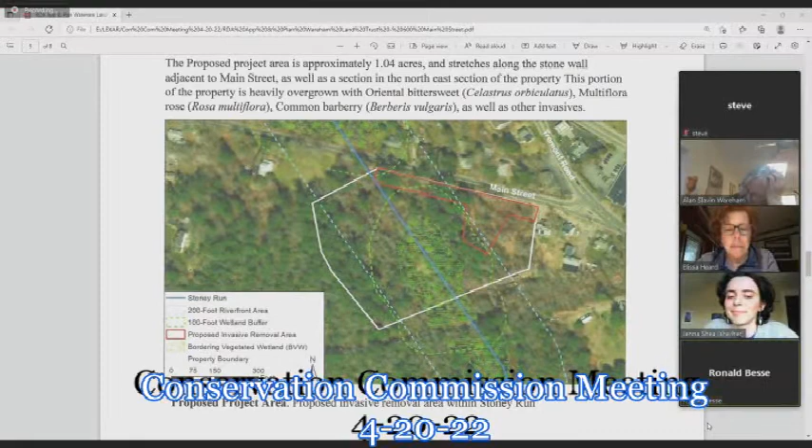Is there anybody on the line that would like to comment on this project? I would like to close the hearing. Second. I have a motion and I heard a second. All in favor, Elisa, Ron, yes. Denise, Carol, yes. Kwame, yes. Michael, Sandy. Thank you. The hearing is closed. I'm gonna be as quick as I can with the names. We have 11 new hearings, so keep yourself active and don't mute. You won't have time to unmute.

Okay, so we have a closed hearing, and I move that we accept the project as presented with a negative 2. Second. That is the motion and it's seconded. All in favor. Elisa, Ron, yes. Denise, yes. Carol, yes. Kwame, Michael, Sandy. You're done. Thank you. Dave, when can they start cutting?

Check with Dave. Once I get them the paperwork, they can get out there and start getting at it. So there you go. Wait for the paperwork from Dave before you go, and good luck. And I did appreciate your initial removal and maintenance and follow-up as part of your project description. I didn't expect anything but the best from the land trust.

Thank you. Well, thank you. Next one, please. Have a good night. Night. We ready?

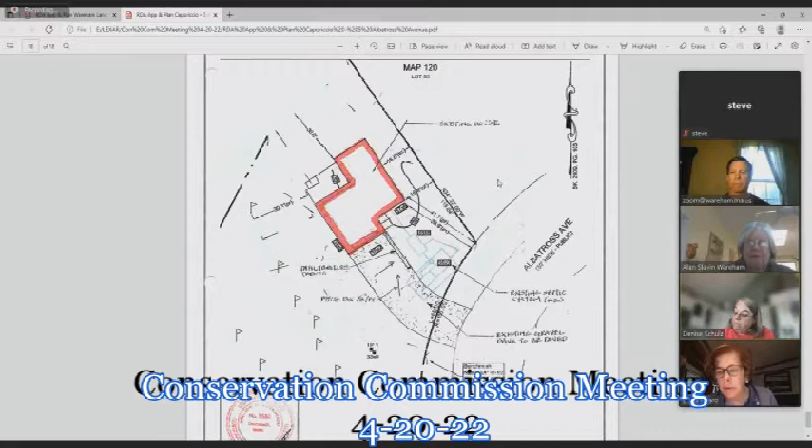Thank you. Is there anybody here to represent this project? This was a project that would have been represented by Bill Lockwood. I had not seen him on, so if the commission wants to table it. I move that we table the discussion. Second. I have a motion and a second to table. All in favor: Elisa, yes. Ron, yes. Denise, yes. Carol, yes. Kwame, yes. Michael, yes. Sandy, tabled. Okay, next hearing.

Notice of public hearing pursuant to the provisions of the Massachusetts Wetland Protection Act, General Laws, Chapter 131, Section 40, and the Wareham Wetland Protection Bylaw, Division 6. A public hearing will be held on Wednesday, April 20th, 2022, at 6:30 p.m. on the request for determination of applicability for Ann Vangos, care of Braza Construction, 16 Main Road, Mendon, Mass., to install a paved driveway located on Assessor's Map 46A-1, Lot 24, 62 Pinehurst Drive, Wareham, Mass.

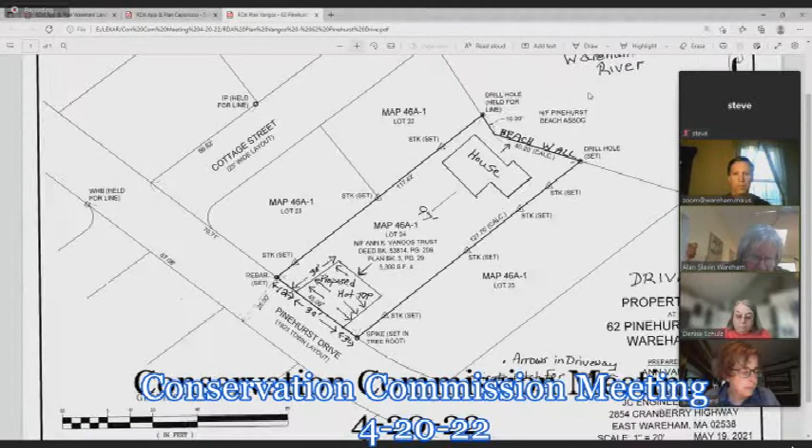Thank you. Is there anybody here representing this project? Braza Construction's here. Paul, is that right? Yes, Paul Braza, yep. Okay. Mr. Pichette will read the project.

Okay, so this project site is at 62 Pinehurst Drive, and this project involves placing a paved driveway on this property. Currently there was just a gravel driveway on the property, and recently there was some work done at the site to remove some tree stumps and whatnot, and the owner wishes to put a paved driveway in that would be 30 by 30 feet in size. Again, up close to the road in the general location where they used to park. They are going to propose the driveway to pitch in either direction to the side versus sloping out back onto the street.

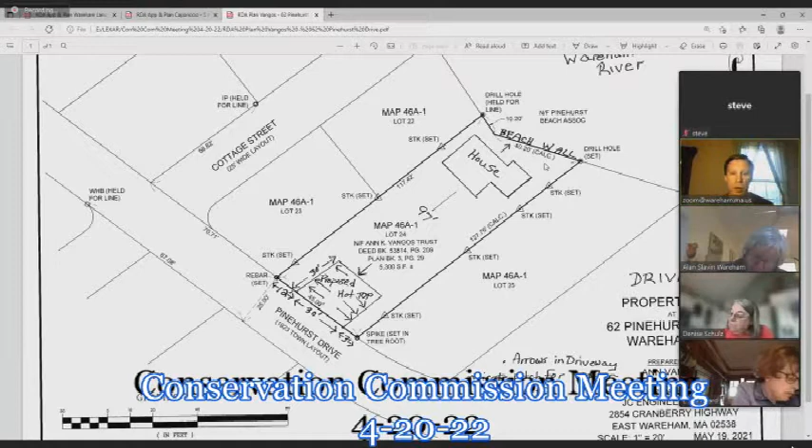So again, the project is in the buffer zone to the coastal bank and the coastal beach, approximately 90 feet from the coastal bank. So I would recommend the approval of the project with a negative determination number 3. Paul, anything to add? No, it's pretty self-explanatory. It's very easy to pitch the driveway the way we requested to both sides. We'll just crown it in the middle and keep the runoff to filter into the ground.

Thank you. Questions, Elisa? Yes, on either side of your 30 feet, how much space is there of ground? If you're staring at the house, on the left side there's probably 10 to 12 feet. Okay. On the right side is about 3 or 4. And what about your neighbors? Are they going to be affected by this? They're not going to be affected by this. Their driveways are far away from that, and they have grass beside it.

So then my other question would be, we're pretty favorable to a driveway that percolates water as well, so a pervious driveway. I don't know if you've given any thought to that. We have not, because the driveway is not very large. That's all the more reason, only because it would be cheaper, not cheaper than doing a regular one, but a pervious asphalt driveway, is my question. Yeah, we have not thought about that, but we can think about it. Thank you.

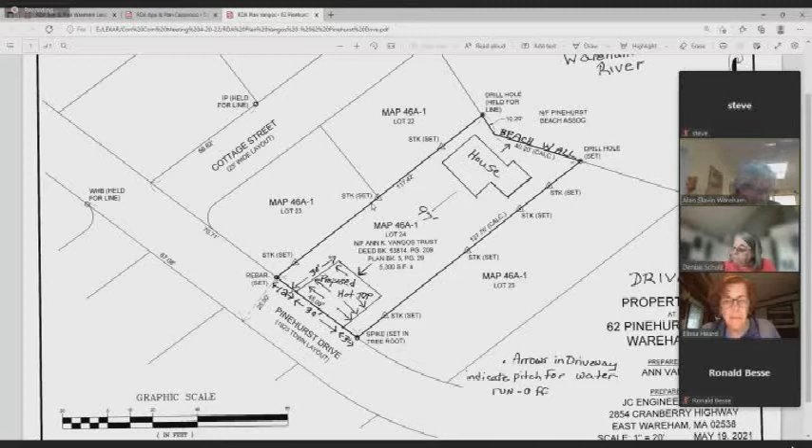Carol? Could I speak by any chance? Yes, sorry, Paul. I'm just asking. You gotta be quicker. I'm sorry, every driveway surrounding this property is asphalt. Yeah, but that doesn't make it right. Okay. It's always everybody else, but we're talking about you, though. Okay, no, I understand. And also the coastal beach isn't very far away from where you are.

Okay, Denise, anything, did you get your answer? Just my statement. I would like them to do the pervious driveway versus just plain asphalt. Carol? Did we lose Carol? Still on mute. Carol, we can't hear you. Well, I'm having trouble with my computer now. Oh, okay.

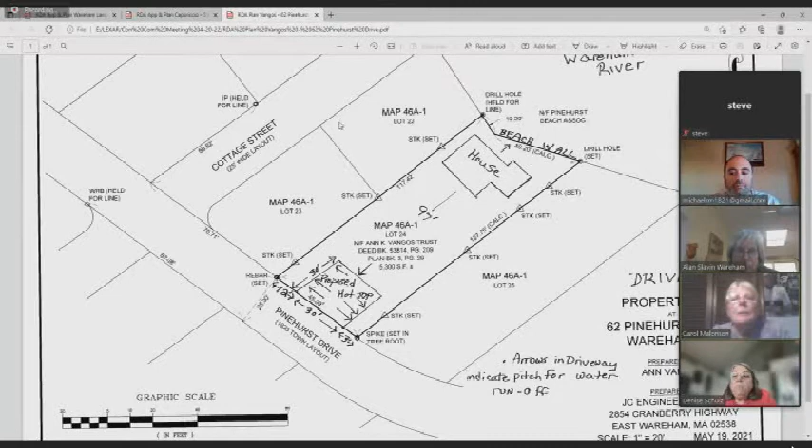Kwame, any questions? I mean, everybody else has asphalt, I get that, but where's the water runoff? I didn't see on the street where there's any drainage, but I don't think that really matters at this point in time, but maybe in the future it will. All right, Kwame, what's your thought? Pervious or impervious? I mean, at this point in time, probably something of a gravel nature, but everybody around the area has asphalt, so I can see where he's coming from. All right, anything else, Kwame?

Michael, anything? Well, there's a garage that literally is right next to the property. That's the neighbor's, correct? Yeah. So that's the neighbor's, and the water's not gonna run right into that garage or affect that neighbor's property at all? Where did he go? Paul? I'm Ann. I'm the homeowner. I just figured out how to unmute myself. Can I just say something? Yeah, go ahead.

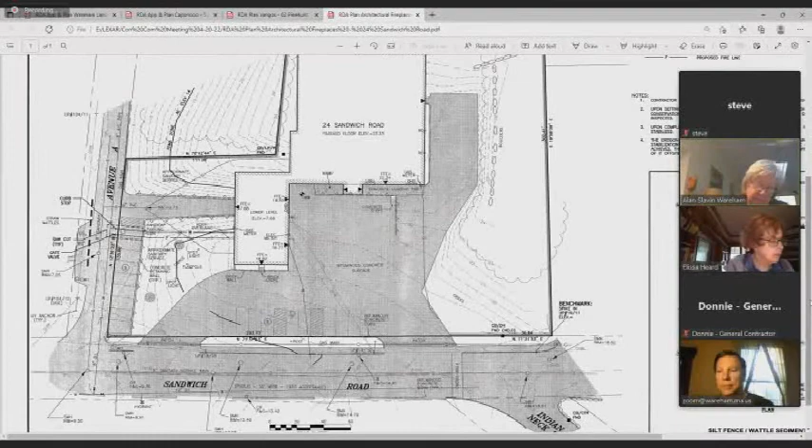Thank you. Is there anybody here for this project? Yes, for the record, Steve Gioiosa with Civil and Environmental Consultants. G-I-O-I-O-S-A. Very good. Well, I can read it on the screen. Thank you. Mr. Pichette will read the project and then we'll ask you for your comments.

Okay, so this project site is at 24 Sandwich Road, and this property is at the corner of Sandwich Road and Avenue A. The proposal is to install a water main from Avenue A into the site to provide fire protection service for this building, which is being renovated. The work is within a coastal flood zone and within the buffer zone to wetlands on the other side of Avenue A. The work would be trench work to install that line, just in the area between the street and the building as shown on the plan.

The work ultimately would be relatively minor in my view, so I would recommend approval of the proposed work with a negative determination number 2. Thank you. Steve, anything to add? Not specifically, unless the board has questions.

The reason we picked this location for the connection versus coming from Sandwich Road is that the Sandwich Road water mains are on the opposite side of the street. It'd be a much more intrusive operation to come in from Sandwich Road, a lot more activity, a lot more disturbance of the land. So that's what drove the location here. And this is an upgrade for fire protection and domestic water supply. Yes, the people on Route 6 would not be happy with the closure. No.

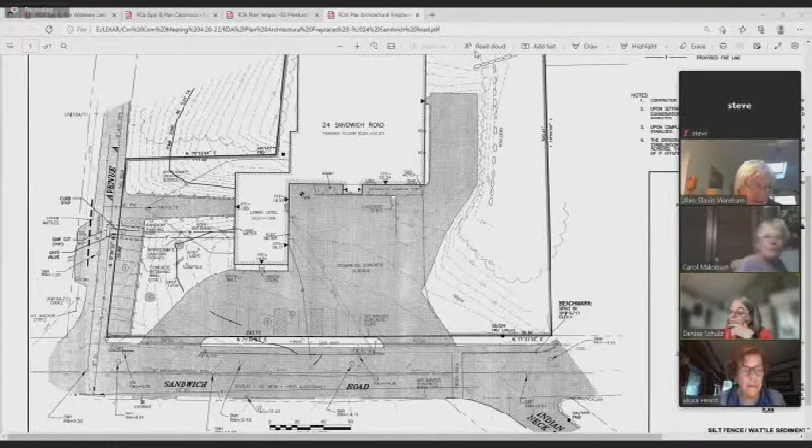Move to close the hearing. Second. I have a motion to close the hearing and a second. All in favor: Lisa, Ron, yes. Denise, Carol, yes. Tommy, Michael, yes. Sandy, yep. The hearing is closed. Okay, are we ready? No, we got to vote on it. Someone has to give me a motion for a negative 2.

I move that we accept the project with a negative determination number 2. Second. I have a motion and a second. All in favor: Lisa, Ron, yes. Denise, Carol, yes. Tommy, Michael, Sandy, yes. So Steve, you got it. See Mr. Pichette for the paperwork before you start anything, okay? Very good. Thank you. Good night.

Notice of public hearing pursuant to the provisions of the Massachusetts Wetland Protection Act, General Laws, Chapter 131, Section 40, and the Wareham Wetland Protection Bylaw, Division 6. A public hearing will be held on Wednesday, April 20th, 2022, at 6:30 p.m. on the request for determination of applicability for Warren Pyne, 264 Cremesa Road, Wareham, Mass. 02571, for beach nourishment located on Assessor's Map 51, Lot 205, Knobska Way, Wareham, Mass.

Thank you. Is there anybody online that will represent this project? Yes, Warren Pyne. Okay, Mr. Pichette will read the project. Okay, this project site is at 7 Knobska Way, which is down at the end of Cremesa Road. And this project involves the placement of beach sand for beach nourishment at this particular site on a coastal beach and partially on the coastal bank.

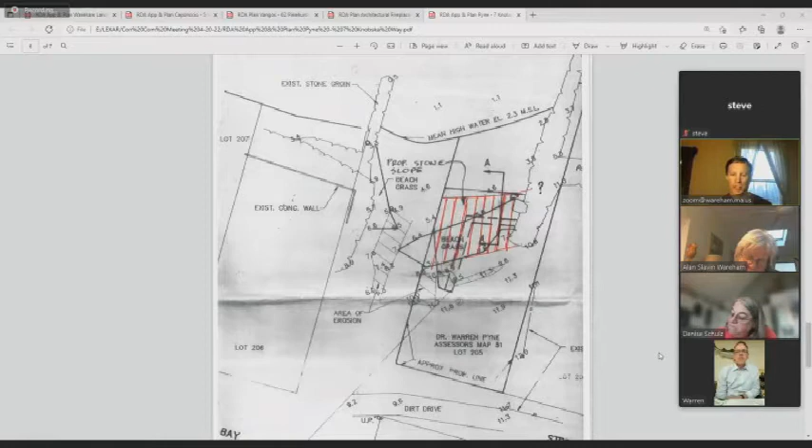Yeah, the sand samples would be brought to the sand supplier to match up the sand sediment grain size, and then that report of what the results are and that you have something compatible would be brought back to the commission, and then the project could go forward from there. So that's basically called a sieve analysis. And so the applicant would provide the sieve analysis to the commission before the sand would be placed. Okay. Anything else, Denise? No, that's it, thank you.

Carol, no questions. Kwame? I know that when I walked there, it definitely looked like it was regressed a lot. But are you bringing any boulders or anything in there as well, or are you just doing this with sand? Just sand. I understand boulders would be a whole different process. Okay, that's all the questions I have. Thank you. Michael?

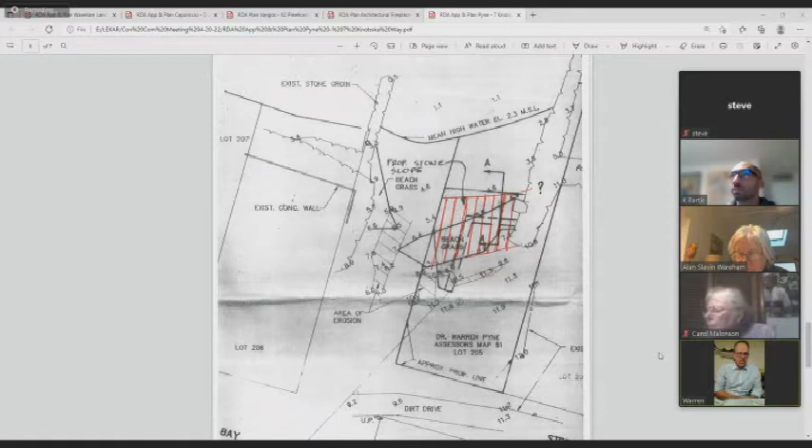Warren, you have a small little stone wall there, correct? Yes. How far from that point will this sand be placed toward the water? Above mean high water. So what are you covering in footage? That was measured by D&J Landscaping, and he said to cover that area from the bank to mean high water would be about 19 yards. And I know that that is higher than what is normally accepted or recommended for this type of application. So we'll have to make do and see what happens this first year, I think.

Dave, the application you said was submitted for 12. Yeah, the application was submitted for 12, so if this is approved, it should be limited to the 12 yards, because once you start going too much beyond what would be a small dump truck load, that's a little bit more. And typically those larger scale beach nourishment projects are handled under a notice of intent. So my recommendation would be to approve the 12 yards that was requested, but not more than that.

Okay, Warren, where will you be taking your sand sample from? Up by where the stone is or down onto the beach itself? Lee Wisha did a sieve analysis already, and I have that grain size distribution in front of me now, and I'm getting the sieve analysis from Highway Concrete, which has a sand that has been used for this. How far from the little stone wall will you be putting this sand toward the water? Don't say mean high water. Give me a hint as to how many feet. 10 feet, as a guess.

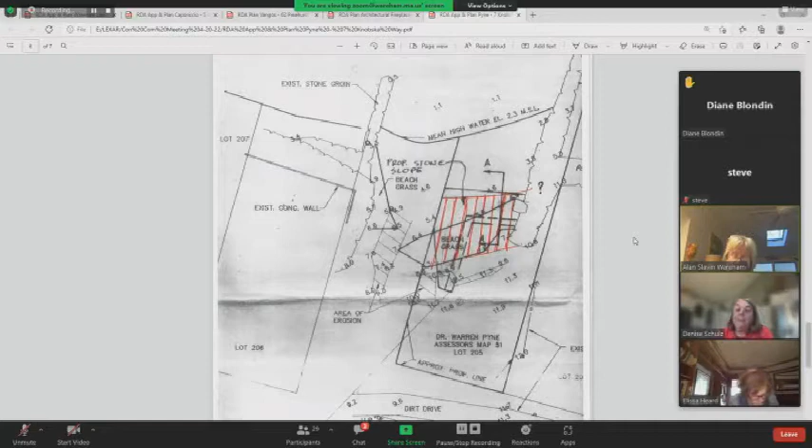Right now, the only thing that's in discussion is the 12 yards of sand to be placed above the high water mark and to be thin where there is grass growing. That's all I'm hearing. I think the beach grass is a long-term plan to save the area, where the sand is short-term; you add it and ultimately the storms take it away. And Warren knows he has no idea how long it will last. So it's 12 yards of sand to be distributed manually by hand up to the high water mark. Is that what I'm hearing?

Well, I still think we should consider the beach grass. Then what would you say? How many would we put in? Well, yeah, I don't know. So here's my thought on this. Mr. Warren is understanding that he's spending the money to have the sand put in right now as a temporary fix for however long that might be. It could be one season, it could be two seasons. None of us know because we can't predict the weather.

So if he's willing to spend the money to get some type of nourishment back, and then do a survey about how much beach grass might be sufficient. I don't think we can determine that just by talking about the project. I think it needs to be visited and reviewed. So for the sake of the project that's before us, requesting beach nourishment with sand, I think we go forward with that and allow that.

And then, with some more time, it can be reviewed to see how much beach grass might be necessary, because we could say 10 whatevers, and it could take 30. So we don't know that. Without any type of review, we would just be frivolously speaking about what is going to work and what's not. So what do we think 12 yards of sand is gonna do? He's understanding that it's maybe not a permanent solution, but for what he's trying to accomplish short term, I don't see an issue with it.

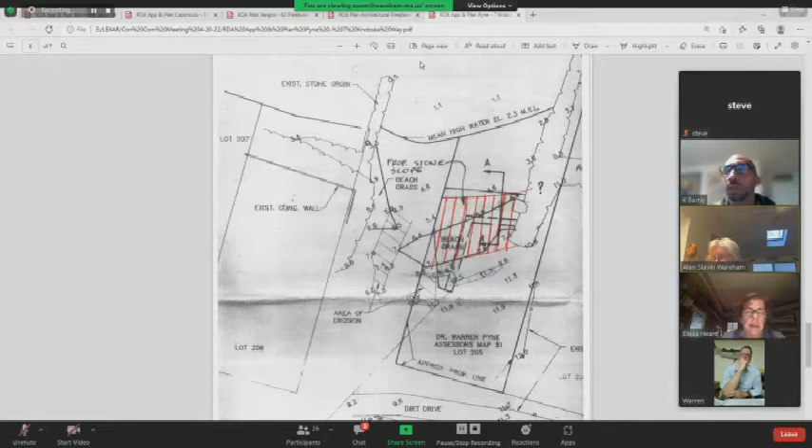I agree. Anything else on the line? Because we'd like to close this hearing. Move to close the hearing. Second. I have a motion to close the hearing and a second. All in favor: Elisa, Ron, Denise, Carol, Kwame, Michael, Sandy. Yes. The hearing is closed.

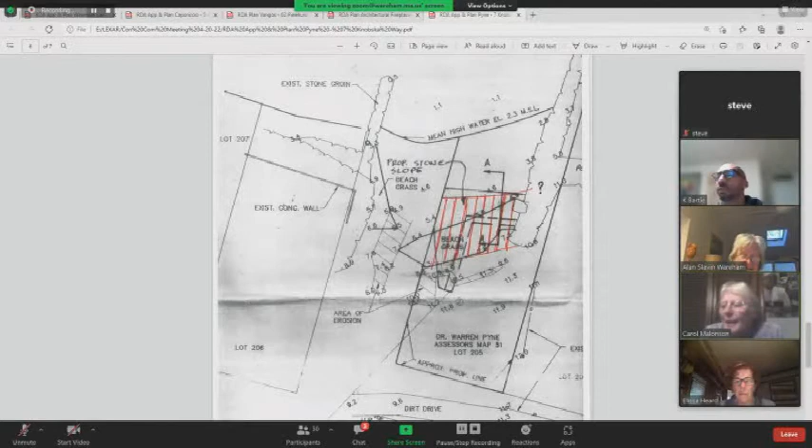I move that we approve the project with a negative 2 determination. Second. With a maximum of 12 yards, all distributed by hand. And that it be limited to 12 yards of sand and it all be distributed by hand. That's the motion. I have a second. All in favor: Elisa, yes. Ron, Denise, Carol, Kwame, Michael, Sandy, done. Please, Warren, don't do anything until you get the paperwork from Mr. Pichette. Thank you. Yes, thank you.

Notice of public hearing pursuant to the provisions of the Massachusetts Wetland Protection Act, General Laws, Chapter 131, Section 40, and the Wareham Wetland Protection Bylaw, Division 6.

A public hearing will be held on Wednesday, April 20th, 2022 at 6:30 PM on the notice of intent for Dylan Freitas, care of JC Engineering. You missed one. Okay, we still have to announce that 72B Burgess Point Road is being continued. We have to open that hearing. Ryan Blacko. Balco. Okay, you want me to start again? Yes, please. All right, I will.

Town of Wareham. Notice of public hearing pursuant to the provisions of the Massachusetts Wetland Protection Act, General Laws, Chapter 131, Section 40, and the Wareham Wetland Protection Bylaw, Division 6. A public hearing will be held Wednesday, April 20th, 2022 at 6:30 PM on the notice of intent of Ryan Blacko, care of JC Engineering, 2854 Cranberry Highway, East Wareham, Mass. 02538. To construct a single-family dwelling, garage, and in-ground pool located on Assessor's Map 22, Lot 1006, A2, 72B Burgess Point Road, Wareham, Mass. Thank you.

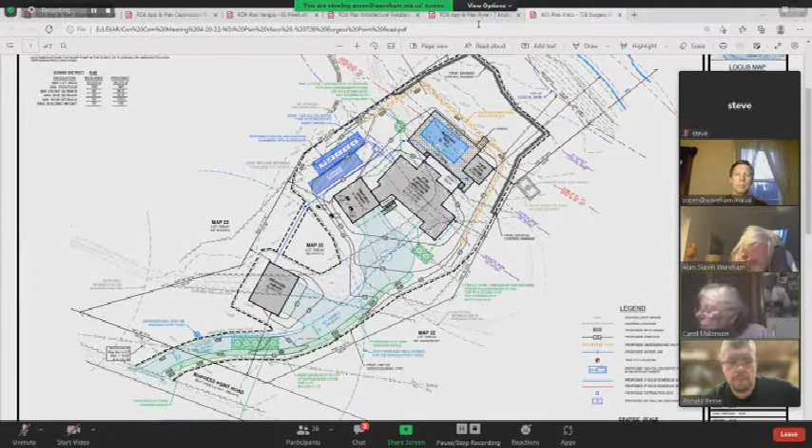Continue until, oh, may the 4th be with you. Oh, sorry. So, let's do it again.

Notice of public hearing pursuant to the provisions of the Massachusetts Wetland Protection Act, General Laws, Chapter 131, Section 40, and the Wareham Wetland Protection Bylaw, Division 6. A public hearing will be held on Wednesday, April 20th, 2022 at 6:30 PM on the notice of intent for Dylan Freitas, care of JC Engineering, 2854 Cranberry Highway, East Wareham, Mass. 02538. To reconstruct a retaining wall and patio located on Assessor's Map 7B-2, Lot 28B and 29, 5 Cleveland Way, Wareham, Mass.

Thank you. Is there anybody here representing this project? Yes, Sam Imelli with JC Engineering. Okay, Mr. Bichette. Okay. So this project site is at 5 Cleveland Way in the Indian Mound Beach area. And the project involves the construction of a retaining wall on a coastal bank and within a coastal flood zone.

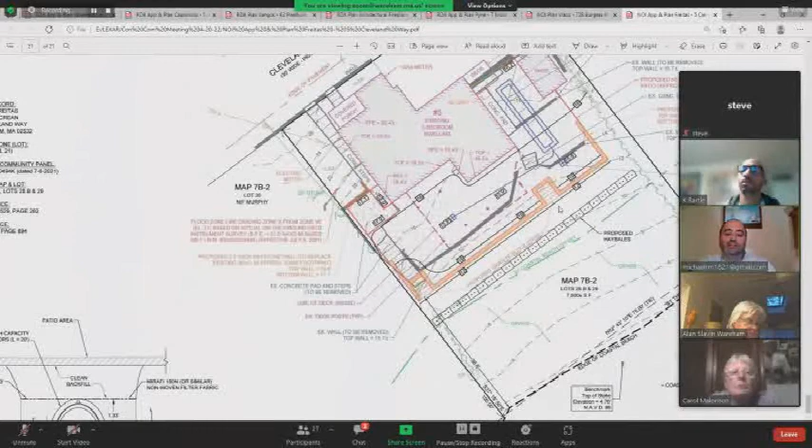There seemed to be 3 stakes. There was one that indicated where the wall would be built out into the beach. There's another one that indicated where those hay bales were, but there was another one way out into the ocean. I think it mentions it there on the graph that Dave has pulled up. Does that indicate anything by any chance or not? No, that's just a point used for survey purposes, but it doesn't indicate any sort of work with this project.

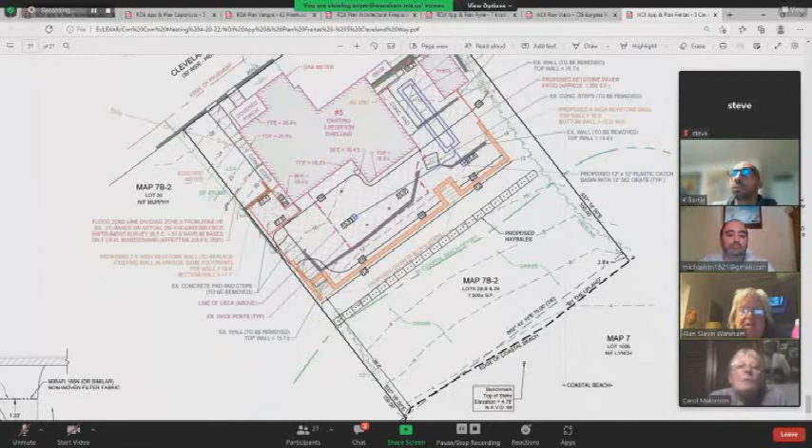Okay, thank you. The Keystone retaining wall, if you place the top of it where the existing concrete wall is, how much further will the base have to be into the lawn? Dave, can you move it over to the description of the standard retaining wall? Up high. That's it. There you go. I can't read it. What is the width of that lower supporting base of that retaining wall? Never mind, it tells me. Is that 16 inches out?

It's not really far. It's not a huge width. The blocks step back an inch or 2 for each block, and there's only maybe 4 or 5 courses. So it'll be just a small infringement into the existing lawn in order to make the top of this wall match the existing wall. Yeah, and any kind of a wall, you'd have to do some sort of a footing, so that would happen anyway. So I think that wouldn't be a big problem. Okay.

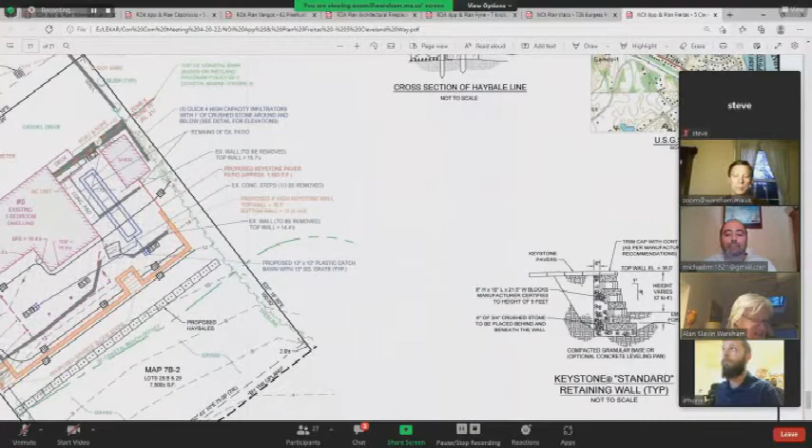I have a question for Dylan. Dylan, when you bought this house, did this crushed driveway already exist? It was essentially a dirt driveway, and the person who did the wall brought in 3/8 bluestone, so it went from dirt to gravel. Did the wall that's retaining that gravel exist, or did you have to create it? There was one there. Okay.

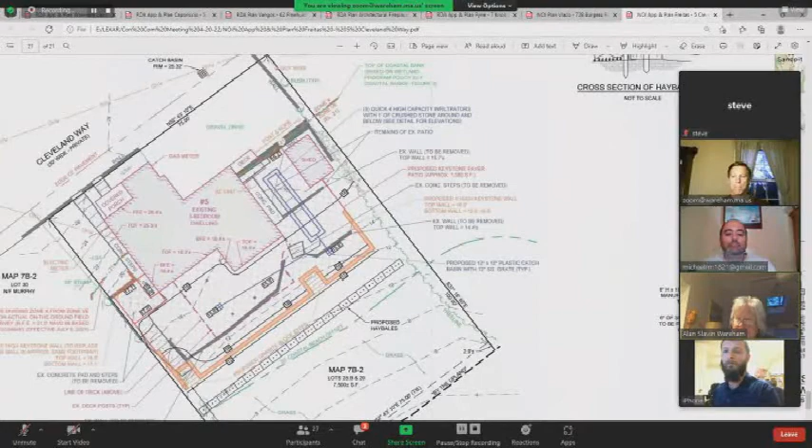So we are going to continue this, I understand. Is there anybody on the line that would like to speak to this project? I'm hearing none. We're going to continue until May the 4th. Is that the motion? Yes. Second. I have a motion and a second. All in favor: Alyssa, Ron, yes. Denise, Carol, Kwame, yes. Michael, Sandy. We're continuing until May the 4th, be with you. Thank you.

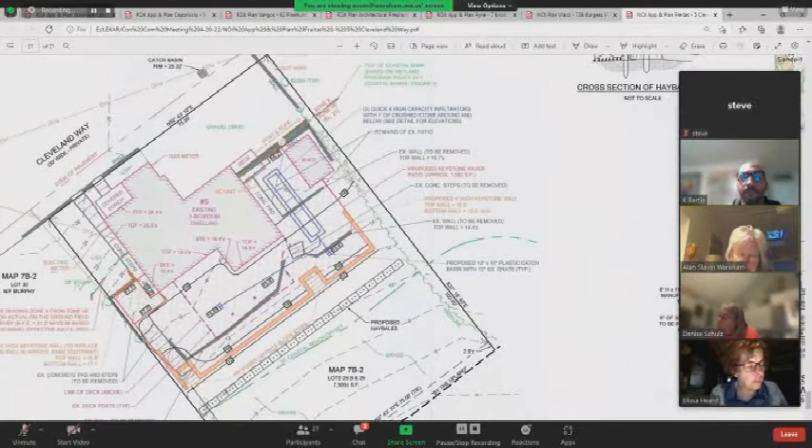I'm sorry. Okay, I have a public hearing for Mr. Green, which has been continued. Is that correct? They wish to be continued, but you have to read the hearing, then we can make a motion to continue. Billy. Notice of public hearing pursuant to the provisions of the Massachusetts Wetland Protection Act, General Laws, Chapter 131, Section 40, and the Wareham Wetland Protection Bylaw, Division 6.

A public hearing will be held on Wednesday, April 20th, 2022 at 6:30 p.m. on the notice of intent for Scott Green, care of JC Engineering, Inc., 2854 Cranberry Highway, East Wareham, Mass. 02538, to construct a single-family dwelling, retaining walls, and utilities located on Assessor's Map 50B, Lot 41, 17 Murphy Street, Wareham, Mass. Thank you. They have requested a continuance.

I move to continue. Second. I have a motion to continue until May 4th and a second. All in favor: Alyssa, yes. Ron, yes. Denise, Carol, Kwame, Michael, Sandy. Absolutely. We're continued. All right, next one, please. I have Mr. Piroli next.

Notice of public hearing pursuant to the provisions of the Massachusetts Wetland Protection Act, General Laws, Chapter 131, Section 40, and the Wareham Wetland Protection Bylaw, Division 6. A public hearing will be held on Wednesday, April 20th, 2022 at 6:30 p.m. on the notice of intent for Robert Piroli, care of GAF Engineering, Inc., 266 Main Street, Wareham, Massachusetts, 02571, to construct a pier, ramp, and float system and a boat lift located on Assessor's Map 51, Lot 8, 278 Cromesett Road, Wareham, Mass.

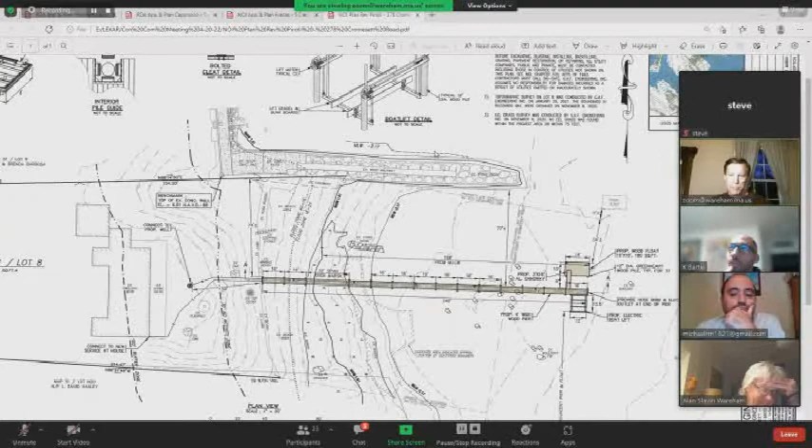That's very nice, but Gary knows the land. Right. I would like to have something from Mr. Buckminster on this, please. Yes. Is there anybody on the line that would like to talk to this project? We are going to be continuing it.

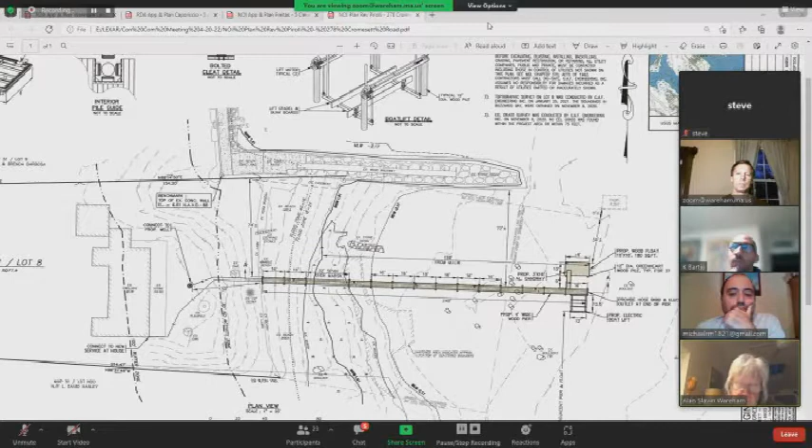Motion to continue the hearing to May 4th? I have a motion and a second to continue to May 4th. All in favor, Elissa, Ron, Denise, yes. Carol, Kwame, Michael, Sandy, we are continued.

Okay. We're up to number 10. Notice, and that's Joseph Barbosa. Notice of public hearing pursuant to the provisions of the Massachusetts Wetland Protection Act, General Laws, Chapter 131, Section 40, and the Wareham Wetland Protection Bylaw, Division 6. A public hearing will be held on Wednesday, April 20th, 2022, at 6:30 p.m. on the notice of intent for Joseph Barbosa, care of GAF Engineering, Inc., 266 Main Street, Wareham, Mass.

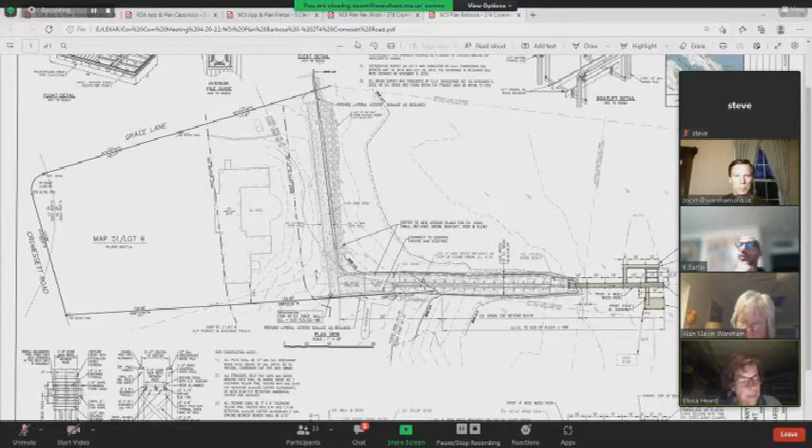02571, to construct a pier, ramp, and float system and a boat lift located on Assessor's Map 51, Lot 9, 274 Cromesett Road, Wareham, Mass. Is there anybody here representing this project, Mr. Madden? That would be me, Bill Madden, GAF Engineering, on behalf of Joseph and Brenda Barbosa. Thank you. Mr. Pichette?

So this is the next property over from the one we just reviewed. This is 274 Cromesett Road. And this project involves the construction of a walkway across an existing stone groin to a proposed pier, ramp, and float system, and a boat lift, again, within land under the ocean, land containing shellfish, and within a coastal flood zone. And again, the site is also within the estimated habitat of rare and endangered species.

The structure would extend out approximately 199 feet into Buzzards Bay from the mean high water line, but a large portion of the structure is on the existing stone groin. A walkway would be built on top of the stone groin to get out to the end to the remaining 73-foot pier, ramp, and float. The plan shows a 10 by 18-foot float on the south side of the pier and a boat lift with a catwalk around it on the north side of the pier.

I would recommend the removal of the catwalk structure, as this would require additional pilings and would occupy more of the water sheet area and isn't really a necessary feature as far as I'm concerned in terms of water dependent. The proposed structure would require installing 30 12-inch diameter greenheart pilings as shown. The number of pilings would be reduced if the catwalk was not included. Pilings would be installed using a floating barge.

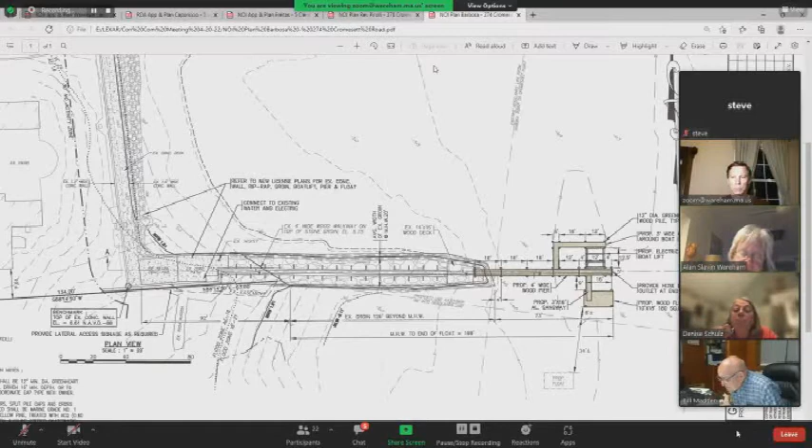I'm not certain. And then when I was looking, there was like an orange thing floating out in the water. Was that marking where this was going to end? Because it may be. We didn't put it out there. We don't have our boat ready just yet. I think I'll have those floats out there for the next meeting. Okay, Denise. I thought that was just a mooring. I wasn't quite sure because if that's a marker, then this actually is entering into the mooring area. No, with the float on it, it's a mooring for a boat. Yeah, it was bright orange. It was just an unusual shape.

Yeah. Okay, all right. And then I would like to see how this affects the different moorings and stuff in the area. And again, this would be the third dock within this little area, but okay. We're going to continue anyway. I'll discuss it then. Yes, and of course, Mr. Buckminster, please, Dave, reach out to him. I'd like to have his comments on it. But that piece of concrete, I thought it was at the end of the patio, which means it could very well be part of the existing stone groin. Yeah, I just wasn't sure what it was. There's a giant chunk out there. Maybe the patio stopped before the end of the stone walkway.

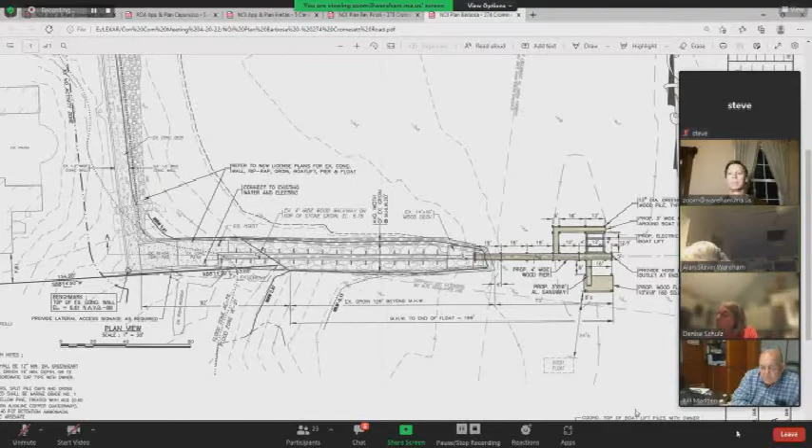Okay, it's going to be continued. Is there anybody on the line who wants to comment on this project? Motion to continue to May 4th. Second. I have a motion and a second. All in favor? Elissa, Ron, yes. Denise, Carol, Kwame, yes. Michael, Sandy, we are continued. Next one. Thank you very much. Yes.

Number 11. Notice of public hearing pursuant to the provisions of the Massachusetts Wetland Protection Act, General Laws, Chapter 131, Section 40, and the Wareham Wetland Protection Bylaw, Division 6. A public hearing will be held on Wednesday, April 20th, 2022 at 6:30 p.m. on the notice of intent for TJP Realty LLC, care of Cape and Islands Engineering, Inc., 800 Falmouth Road, Mashpee, Massachusetts, 02649, to reconstruct and pave a portion of Over Jordan Road located on Assessors Map 20, Lot 0, Over Jordan Road, Wareham, Mass.

Anybody here representing this project, please? Yes, good evening, Mark Dibb with Cape and Islands Engineering representing TJP Realty. Thank you. Dave?

Yes, so this project site is at Over Jordan Road, and the project involves paving the road and the installation of stormwater structures within a coastal flood zone and in the buffer zone to a coastal bank. The existing gravel road, which is Over Jordan Road, is to be paved for a majority of its length from Great Neck Road to just before you start getting to the end of the road where the causeway is.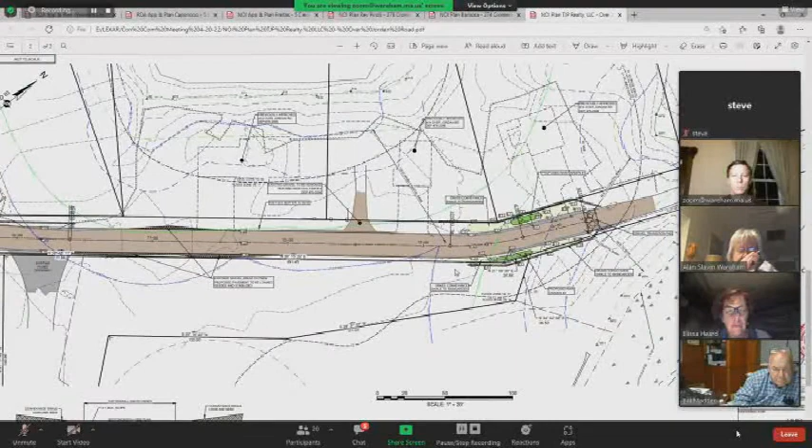that first plan area goes about 450 feet, and that is all within floodplain, but not within any other buffers. And the intent behind the drainage is to protect any neighboring properties that are existing. You'll see there's 2 existing driveways on this plan with drainage swales to make sure runoff is properly directed away from those properties as well. If you've been to the site, it's very flat throughout this entire area. It's about 3 feet of change as the plan progresses. That second plan on the first sheet was again all within floodplain.

And so after about 1,300 feet down the road is where we start to get into the buffers to the salt marsh. And as you get closer to the causeway, in this area, the intention with the drainage is to fully meet water quality standards, providing the rain gardens. One thing we can't do and don't really want to do is any kind of catch basin system, because the road is very flat. We don't want to disrupt anything more than we have to by regrading to make slopes work to catch basins. We're really trying to provide a country type drainage for the critical areas on site.

This is just a private landowner trying to increase safety and comfort driving this road. There's portions of it right now where you cannot pass 2 cars, but it is a widening in the range of, there's actually a couple spots where we're going to narrow the gravel with pavement, but it varies from a 2-foot widening to I think 4 feet at the max. We're basically just proposing to pave the road, and as noted, DEP has requested a stormwater checklist. We're treating this project as a mix of new construction and redevelopment.

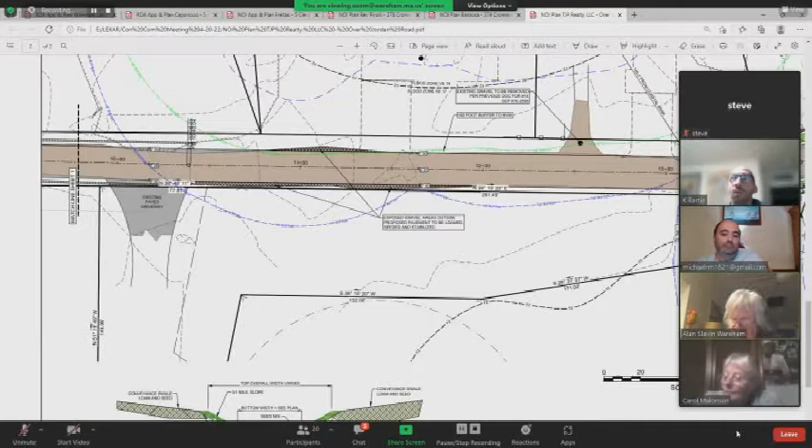Okay. My question, I believe it was answered. The rain garden and maintenance is going to be covered. The 2 hydrants will be looked at because they're going to have to be moved, and the tree removal. I'd like to have the trees identified, which ones would be removed, because I'd like to have things planted in its place. If you're going to take down a cedar, I want another one planted. But that's me. When do you expect this work to start? Summer, spring, fall? We were hoping for late May, but we shall see if we can get the appropriate approvals. So at this point, it would be late spring.

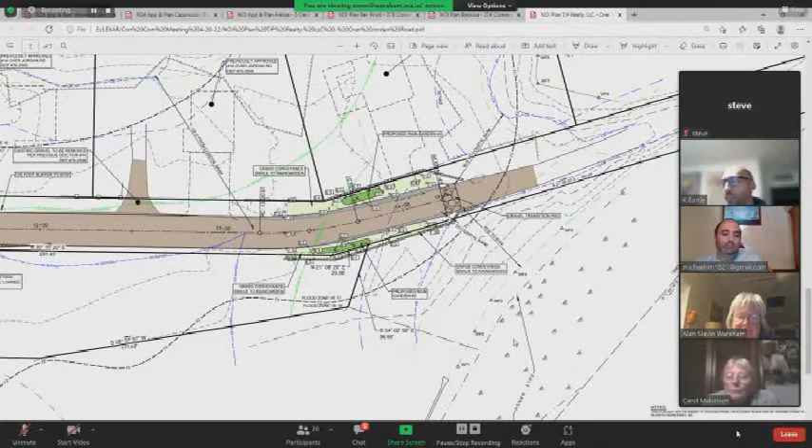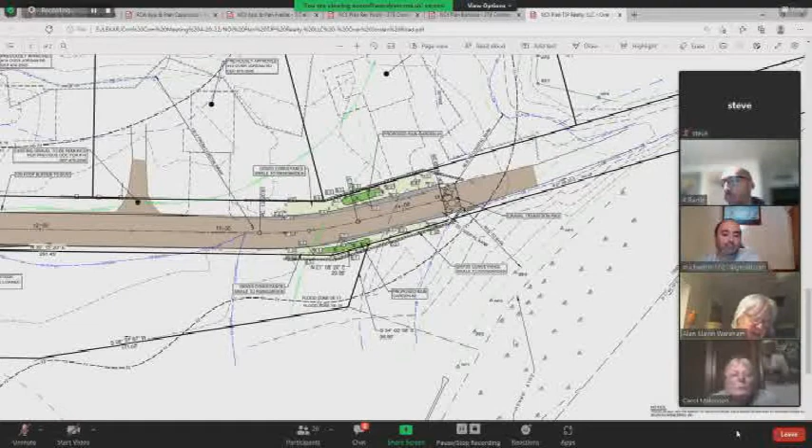Now, I know it's outside of our purview, but the nice little stone on the right, you're going to have to take that stone pylon and move it over. Correct, yes, that's shown on plan. Every effort possible will be made to reconstruct it as it exists in the new location. Okay. Because I wanted to make sure it looks like the other one. Correct. If you're going to put mortar on it, don't use yellow. Anyway, so you're going to start as soon as you can, hopefully late spring, early summer.

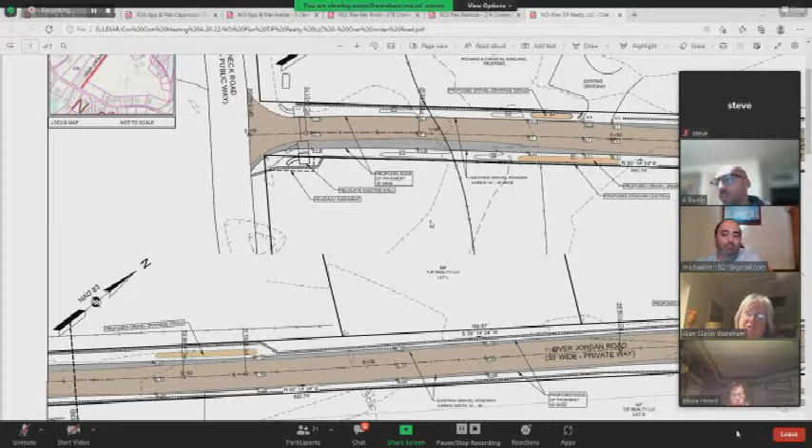I honestly want this whole thing to be pervious. By making this whole 1,400 feet pervious. I want it pervious. Right. And I want a maintenance plan for maintaining its ability to absorb water. That's what I'd like to see. I don't want to see this all paved. No. Well, paved over a parking lot. I mean, we all remember that song. So I know it is extremely expensive putting in pervious asphalt, but that's what I want. Then I want a plan for maintaining its ability to be pervious. That's me. But is there anybody online that would like to speak to this project? Because it will be continued.

Motion to continue to May 4th. Second. I have a motion. Mark, May 4th, good? Yes. Okay. I have a motion and a second to continue until the 4th of May. All in favor? Elisa, Ron? Yeah. Denise, Carol? Yes. Tommy, Michael? Yes. Sandy? Yes. Dave, has Mr. Lockwood joined us? No, I do not see Mr. Lockwood on the line.

Hello? Sorry, is there anybody here for the Capriccio hearing? Is there somebody that just came on that I believe might have a question? Steve, did you have a question? I was just wondering how things are going. I just got back and I forgot to bring my phone with me while I was gone, so I didn't know if we were all set. Which project are you here for? The 27 Agawam Lakeshore Drive. Yeah, we haven't come up with it yet. Oh, okay, okay.

So I would take a motion to untable Capriccio and then a motion to continue. So we need to untable Capriccio. I have that motion, I have a second, all in favor? Alyssa, Ron, Denise, Carol, Tommy, Michael? Yes. Sandy? So it's untabled. Motion to continue Capriccio. No, Elisa, will you please read it into the record, then we can continue. Oh, sorry. Yes. So we read it into the record.

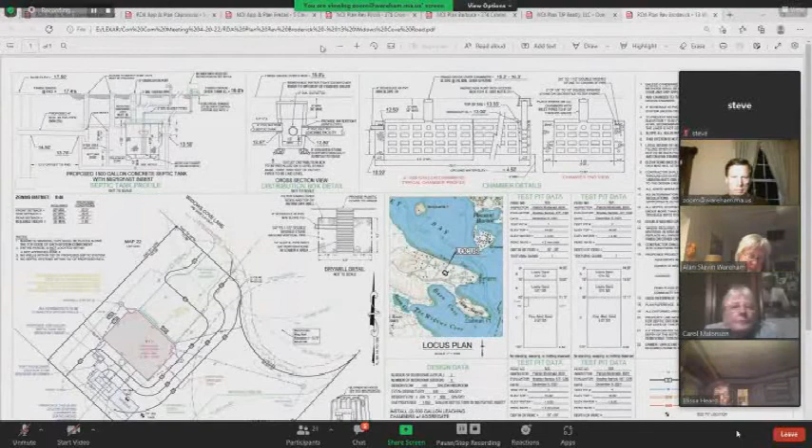While he's pulling it up, I went down there the day after a major rainstorm. And yes, there was a puddle in the cul-de-sac, but that runoff did not come from this property we're talking about. It's coming from the property that had the paved driveway. All the driveways in this area are either crushed stone or block. So there was only one paved driveway, and that was the neighbor. Anyway, okay, Dave, your turn.

Okay, so this project site is at 13 Widows Cove Lane. And the project involves the construction of a single-family dwelling, driveway, grading, and septic system on this property with a new well as well. At the last meeting, we had continued this hearing because there was some discussion or concerns about runoff from the proposed construction.

We have received a revised plan which proposes a gravel driveway instead of a paved driveway. And also dry wells proposed to handle roof runoff from the dwelling. So in terms of any runoff issues, in my opinion, those are now addressed by this plan revision. So I would recommend the approval of the project with a negative determination number 2 based on the revised plan. Thank you. Sam, anything to add? No, that was summed up nicely. No further comment. Okay, questions on the commission?

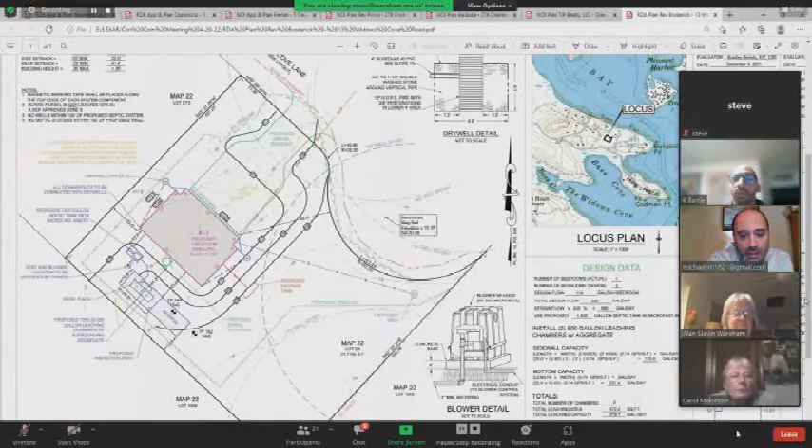Michael. Just one quick question here. I see a proposed tree line here at the bottom in green. If I follow that along the line, I see above it says existing tree line. Is that going to be the same, by any chance? So yeah, if you follow the proposed tree line around, that would be the limit of clearing for this project, which would tie back into the existing tree line. There's like a little short woodsy area around there. All right. That's all. Thank you. Is there anybody online that would like to comment on this project?

Madam Chairman, this is Jeff Johnson again. I think you're talking about my paved driveway. Yes, across the street? Yes, I am. So just a quick thing there, and I appreciate the committee's look on this, and also the engineering there to make the suggested changes with regards to the driveway and also the dry well. I would contradict the fact that the puddling is coming from my driveway, and I'd be happy to show a picture. I took a picture the other day. If you look, the puddling actually begins on the other side of the cul-de-sac.

I will say that after the rainstorm, I could see water was running off your driveway because of how it disturbed the soil going down to this easement. So if I said it came off your driveway, there's other contributors to it, but your dog did not like my walking.

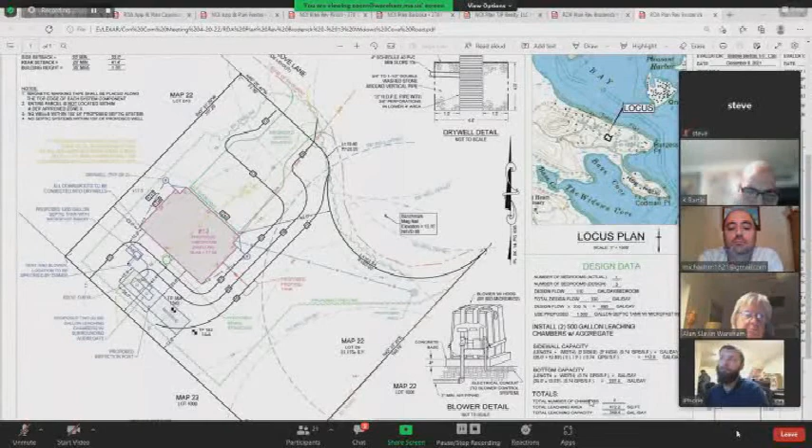No, I was just, if that's going to be aligned in the committee's, I'm certainly not an engineer. Like I said, it's just anything that's changing the status quo. I just want to make sure we don't make a situation that is already bad worse. I guess that would be my final statement. So your concern is by cutting back the trees, we will increase the water flow off the property. And I'm suggesting that a lawn will take care of that. Okay, I appreciate it. Thank you, committee.

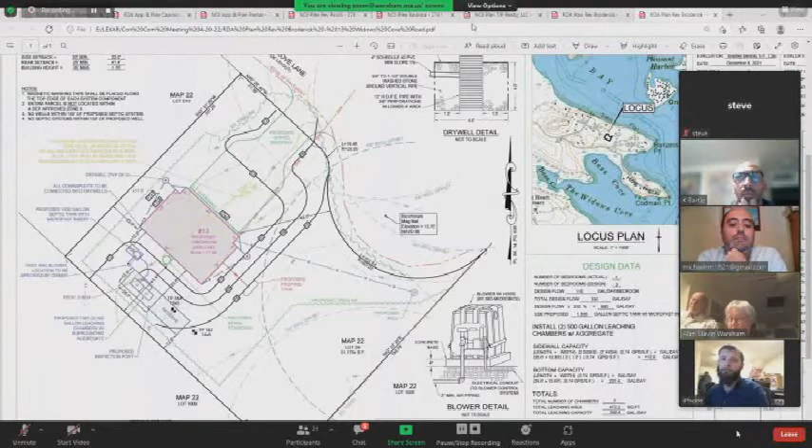Anybody else would like to speak to this project? None. Motion to close the hearing. I have a motion to close. Second. I have a second. Alyssa, Ron, Denise, Carol, Kwame, Michael, Sandy. The hearing is closed. We want a -2.

I move that we approve this project with a -2 determination. Thank you. I have a motion and a second for -2. All in favor, Alyssa, Ron, Denise, Carol, Kwame, Michael, Sandy. Yes. Okay, before you start any work, please see Mr. Bichette for the paperwork, okay? Will do. Thank you for your time.

Thank you. Next hearing is Stephen King, 27 Agawam Lakeshore Drive. Is there anybody here representing that project? Yes, good evening, members of the commission. Brad Holmes with ECR representing this project. Okay. Mr. Bichette?

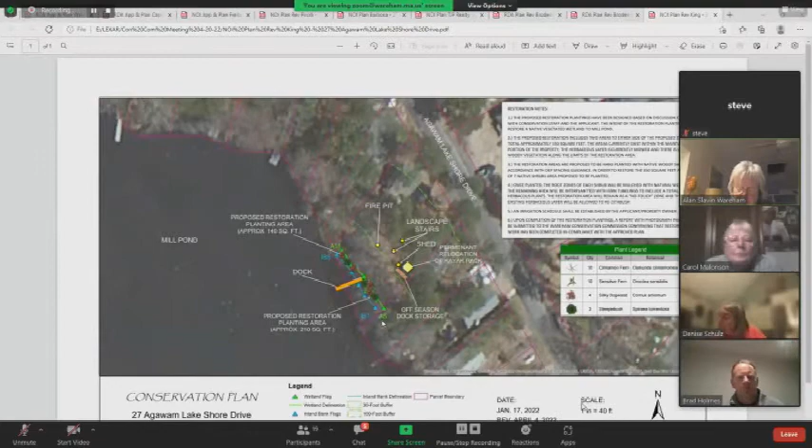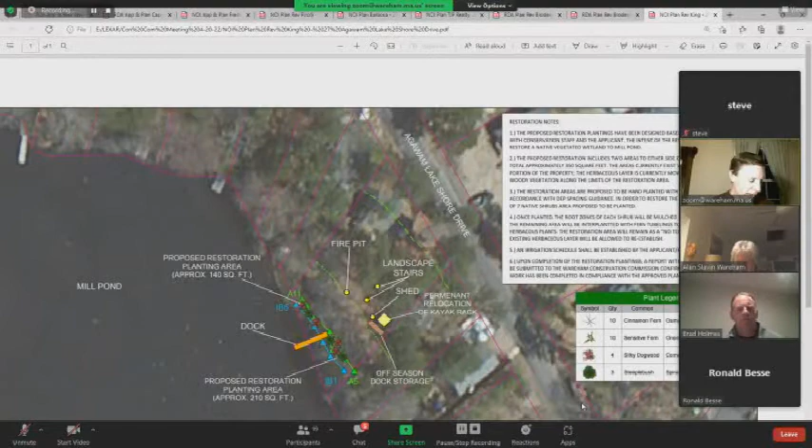Okay, so this project involves the construction or installation of a dock within land under a water body and within a bordering vegetated wetland. A 4x28-foot portable aluminum dock is proposed at this location in the Agawam Mill Pond. The proposed dock would be in 2 sections and would be on wheels so that it could be rolled out of the water seasonally. The dock would be installed and removed by hand.

At the last meeting, we had continued the hearing for a few reasons. One of which was there was some disturbed bordering vegetated wetland at the site that we wanted to have restored or replanted. So this revised plan that we have does show a restoration of that altered area. Also, there was some discussion of some other features, including the walkway and the fire pit that might have been within the 30-foot no activity zone. It looks like those features are just outside the 30-foot no activity zone, but are in the buffer zone. So those are being requested to be approved sort of after the fact as part of this application.

And we also wanted to get a location shown where the dock was going to be stored during the off-season that was outside the 30-foot no activity zone. And again, that is now represented on the plan. So I would recommend that the proposal be approved based on the revised plan with the standard conditions and the added conditions that the dock be stored outside the 30-foot no activity zone during the off-season, and that the disturbed bordering vegetated wetland be restored according to the plan submitted.

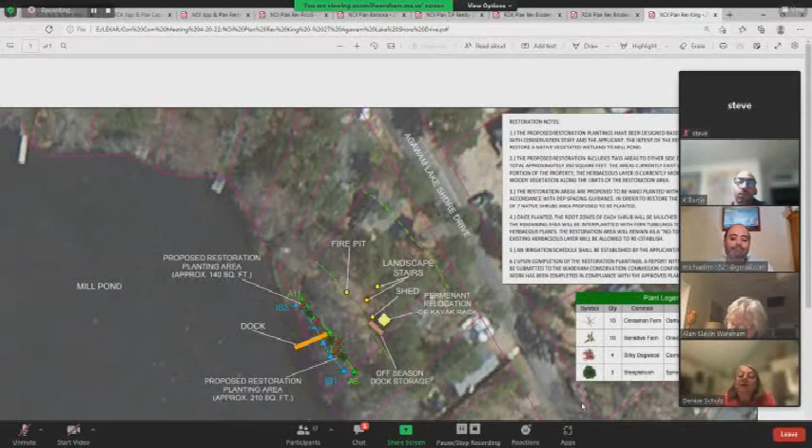So I have a motion to close the hearing. Second. I have a motion to close the hearing. All in favor? Alyssa? Yes. Ron? Denise? Yes. Carol? Yes. Kwame? Michael? Yes. Sandy? Hearing's closed.

So before I make the motion on the project, the work that was done, Dave, was that all done by the homeowner, or was there a contractor that did the work? Do we know that? As far as I know, it was done by the homeowner, but honestly, it's relatively minor in terms of the work, but he may have had a contractor involved. I don't know the answer to that. Okay, because if we don't know the answer to that, what should we just issue? Issue the fine to the homeowner. Okay.

So Sandy, you might have to pull the paper out on this one. Because we would have approved them to do this work, Dave. Yes, I think that situation would warrant a $100 fine. So that's why I just wanted to have Sandy pull out the. Starting any approved work prior to, at $100. Failure to comply, no, wait a minute.

Wait a minute, I'm getting there. $300 for any work requiring conservation approval in wetlands or in 30 to 50 feet, no work zone, nope. $200, any work requiring conservation commission approval in flood zone or 100 foot of edge of water, riverbank, that would have been permitted if it had been filed, so it's a $200 fine. Okay, yep.

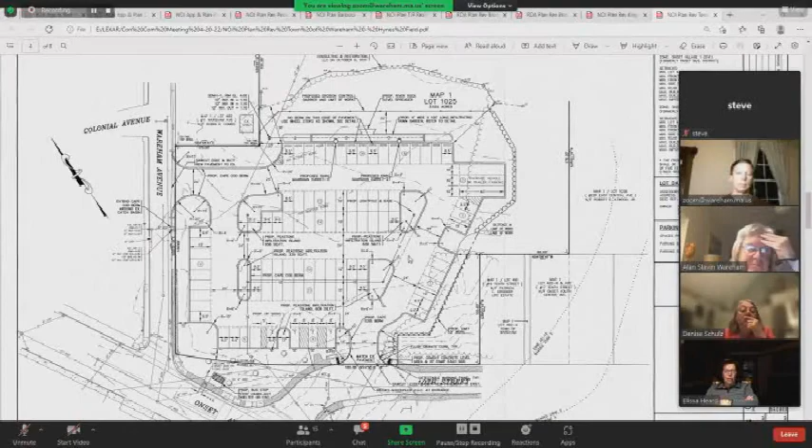We show that we have a small level spreader out at the rear of it, so that when you do get the more intense rainfall events, the water would still drain through the system. First flush is what we're contending with in a stormwater management system such as this. Excess flow after the first flush passes would discharge through that level spreader and find its way into the neighboring wetland. So that was the concept. I hope I'm not repeating myself. Did we talk about that the last time? Perhaps not to this degree, but that's what the goal was.

Those Rain Guardian turrets that we show, those round circles at the end of the parking lot, are pre-treatment devices. They'll remove all the coarse sediment, all the floatables, all the trash that's in that stormwater, and collect it, and it'll be visible at the surface for when the appropriate party comes along to clean those things out.

And not the garden club. Yes, thank you.

It's right there. It's not like in a catch basin. I'd like them over catch basins in some instances, this being one of them, in that you see it there and you know that it needs to be cleaned up. In a catch basin, you have a 4-foot sump, you don't know what's in the bottom of it, and the only time you know it needs to be cleaned is when the thing's full to the top. So that's what we were concepting out there.

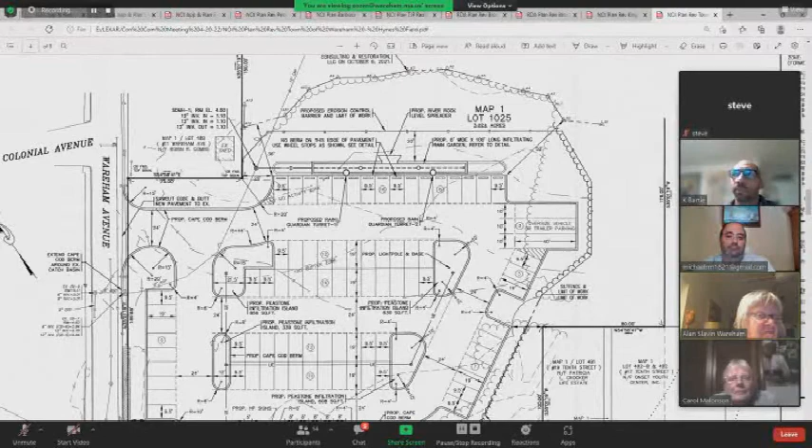Okay, Bill, Michael, did you have anything else? No, that was it. Go ahead. Okay, Bill, I got it. That back row is 16 slots and they're 19 feet long. Yep. If you were to remove those 16 slots and bring your rain garden maybe 8 or 9 feet into the parking area, you still have a wide turnaround. You have reduced the amount of impervious surface. You reduced it by 16.

Is that possible by bringing that rain garden closer to the actual parking area and remove those 16 slots and just leave them as open space? Yeah, or maybe parallel park, you could put maybe 4 cars in parallel parking there. I don't know, there would be a few spaces. I think you could get parallel parking. It's a good suggestion. It's a good idea.

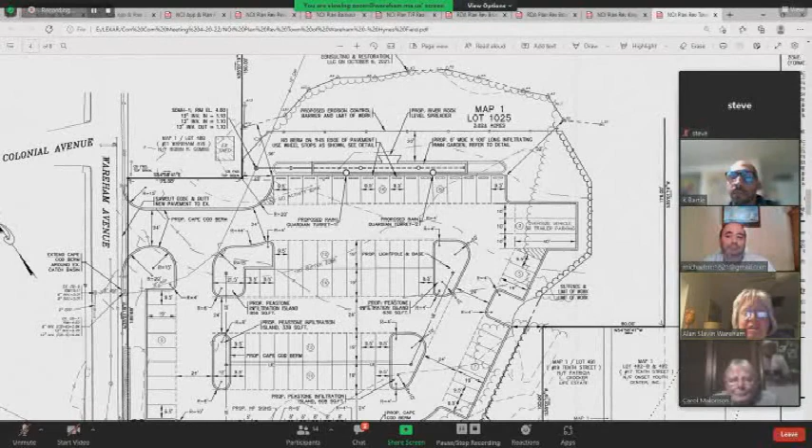I would recommend that because you're hearing the board talking about a reduction. You're hearing the board talk about a better water retention system. Am I summarizing everybody? Right. And we also feel that it's a positive project. We don't want to lose the project. And I really do think we need Mr. Menard's approval to have your retention basin there because it will have to be cleaned out frequently and he's the staff that will do it.

So I think if we put something like that in that'll last for a number of years, maybe it will make everybody's life a little easier. Then why don't you come back with a revised plan, getting rid of those 16 parking places, putting in a water retention system that you saw in Pennsylvania, and let us take a look at the plan. Is that all right? That's fine.

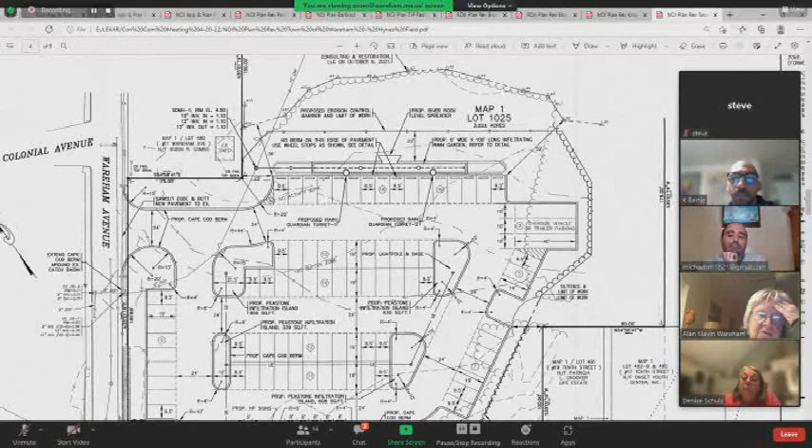And I just want to point out too that I'm not opposed to the project either. I just think it needs to be the stormwater. You don't want this to become a pollution source. That's the key. So my objective is not to say that the project shouldn't go forward. I just want to make sure that the stormwater treatments are the best that can be put in place if it's going to be put forward.

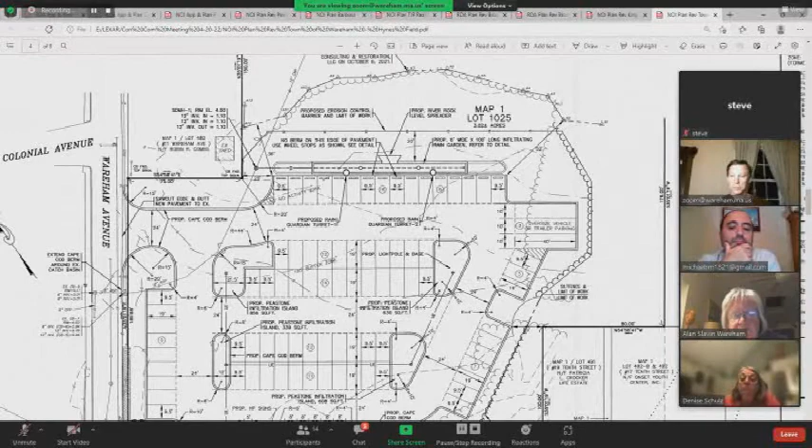So, Bill, you talked to Mr. Buckland. It's Buckland's project, isn't it? Yes. I'll do that. And that's fine. The treatment though is a filtering rain garden. I just want everybody to have a good grasp on that. I think it's really the only solution we have here in this particular instance. I think it's a good one.

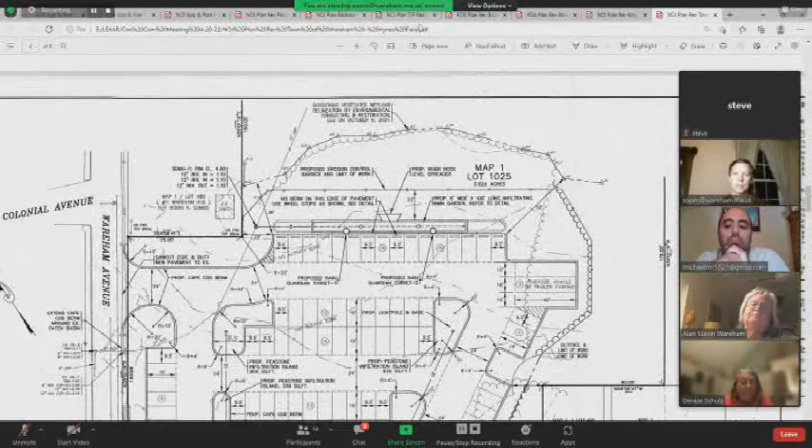Okay, then is there anybody on the line who wants to comment on this project? If not, I'd like the continuance. Move to continue. Second. I have a motion and a second to continue until May 4th. Elissa, Ron, yes. Denise, yes. Carol, Kwame, Michael, yes. We are continued until May 4th. And Bill, I'll be happy to talk with Mr. Buckland, Dave and I, if he has any concerns about our recommendations.

Okay, well, I'll talk to him tomorrow. We'll figure out what to do and keep this thing moving forward. Okay, that's fine. Thank you. And I apologize for not having all this stuff staked out. It just happened. But I'll take care of it. Thank you all. Thank you. Good night.

The next hearing is for Wareham MA3, which I call 90 Fearing Hill Road. Is there anybody here for that project? Hearing none. Motion to continue to May 4th. I have a motion to continue until May 4th. Second. And a second, all in favor, Elissa, Ron, Denise, yes. Carol, Kwame, Michael, yes. Sandy.

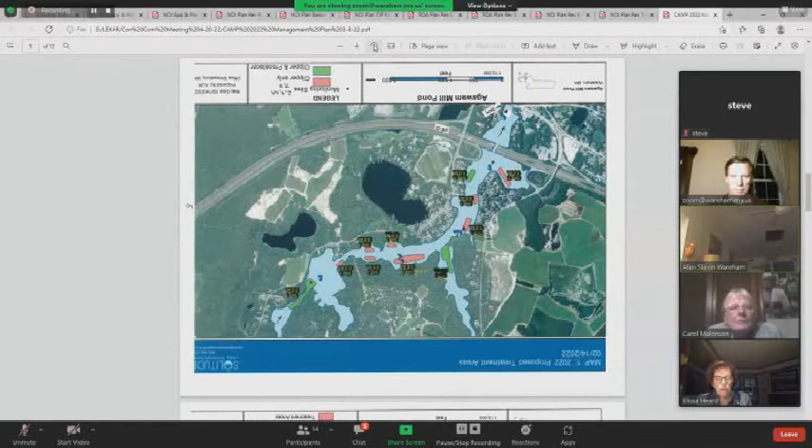Okay, so this particular discussion has to do with the group known as CAMP, or Clean Up Agawam Mill Pond, and they have had an order of conditions in place for several years to do treatment of invasive aquatic vegetation with herbicide. So they've had this plan going for several years now, and they're sort of in maintenance phases at this point in time.

And Mike Lenahan, who's been heading up this project, is on the line and will comment in a few moments. But essentially, they're presenting their treatment plan for 2022 to, again, spot treat areas so that the invasive plants don't continue to take over the pond and destroy all the work they've done over the last several years. So the plan this year is again to do an herbicide treatment, and typically they have always used this one particular herbicide known as Clipper.

This year they're looking to add a second herbicide, which is known as Procellacor. This is used to treat a different type of invasive plant that's been identified as starting to get a little bit more prominent in the pond. So that's basically the discussion at this point, and I'll let Mike speak to it a little bit more, since he's the one who's spearheading this whole project, and he can go over where things stand. The project has been reviewed by the Division of Marine Fisheries and the Natural Heritage Program, and they both have okayed what's being proposed in this 2022 plan.

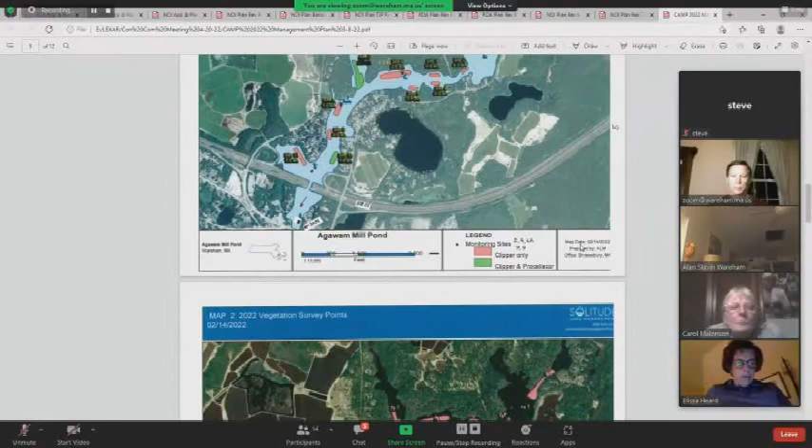And the agencies that I deal with every year have seen this plan that you're looking at, which you're only seeing one map, but that's also a 12-page production that we put together every year. It looks very similar year after year, but they've approved everything. So we're here in front of you again this year to go forward with our 6th or 7th treatment. And I represent about 75 abutters around the pond; about 60 to 65% of the abutters are members of CAMP.

And we're hopeful to use this second chemical. They've had great luck with it, and even the state is using it on their own ponds. That's pretty much it, Dave, I guess. I'm looking to extend the order of conditions. It's within the time limits and so forth. Every 5 years, I have to do a little bit larger report, because of the endangered species requirement, and we'll be doing that next year.

What is that, Dave? That's a MESA filing? Yes, that's what Natural Heritage requires.

I'm becoming a conservation member here pretty soon if I get more knowledge.

But I appreciate what you guys have been doing, and I know some of you had seen me before, but maybe some of you haven't, and that kind of wraps up my presentation, I think, unless you have any questions.

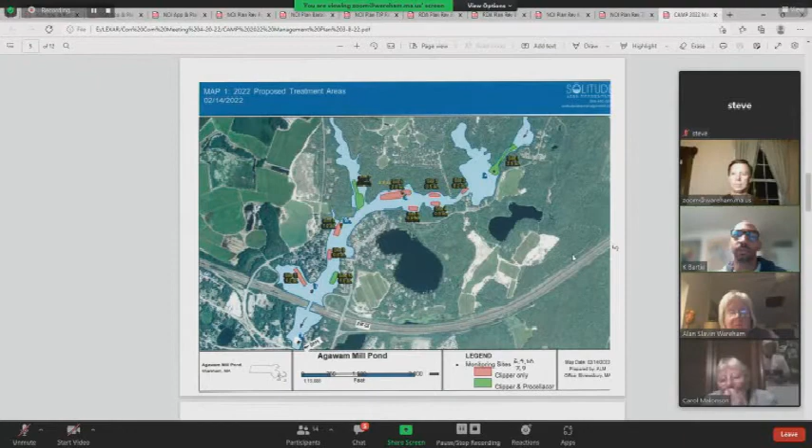Okay. Carol? No questions. Great job. I think it's a wonderful thing they're doing. Kwame? Oh, no, it's a great project. Hopefully it keeps going. Michael? I think it's a wonderful thing you're doing. Hopefully setting a good example. Thank you. You're welcome, thanks.

Denise, if you go to Tremont Nail and stand on Elm Street and look up toward Route 28, that's what the pond looks like, full of that weed. Okay. I will. Thank you.

Okay. So Dave, do we vote or just give a consensus of support? Well, I would say two things. The commission should just sort of give their support and approval for this treatment plan of 2022. As far as officially extending the order of conditions, I did not actually put that on the agenda for this meeting, but I will put it on for the next meeting.

So at this meeting, you're basically just going to vote to give your support for the proposed treatment plan for 2022. And then at the next meeting, since you've already seen what we're talking about, it would just be a matter of voting for an extension, but I just did not put it officially on this agenda. Okay, so this is a vote to support the project for 2022. Yes.

I move that we vote to approve this project for 2022. That we vote to support the project. Yep, 2022. Second. I have a motion and a second to support the project. All in favor, Elissa, Ron, yes. Denise, Carol, Kwame, Michael, yes. Sandy, yes. You got the support. Okay. Thank you very much.

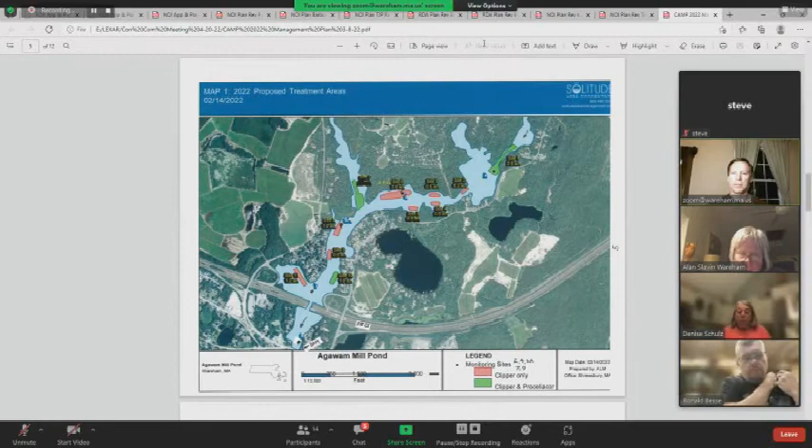Sorry, too much peanut butter in my peanut butter sandwich.

Okay, response to the AG letter. You want to talk about it, Dave, or are we close? I think we're pretty much close. It's just a matter of getting those last few sets of minutes completed and voted on Monday, and then we can get all those sets of minutes to the person who requested the information, and that should wrap up the issues with regards to the AG's requirement of the commission.

Now, it's my understanding Miss Vicky would be willing to get acknowledgement that all the minutes have been posted on the town website, and she does not want a hard copy. Correct. Okay. Now, one question, Sandy. Wait a minute. Okay. I compared my list of minutes to those posted on the website and came up with at least 8 sets of minutes that have been approved but not posted. And Mr. Bichette is working with the town clerk to get that. And I know Denise is going to talk about the open meeting component.

Yeah. The certificate, do we have, I mean, I did one and turned it in. Are we supposed to be doing that? Because we were supposed to do it within 2 weeks of her letter. We have to fill out the AG approved form. Yeah, now, I thought the clerk said she was going to take care of that. But she didn't have any of you guys sign it, did she? Well, and even she wanted it.